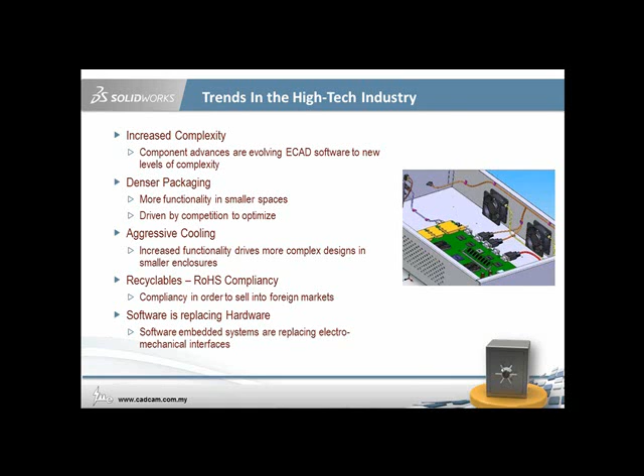First, the challenge for high-tech industry is to accelerate time to market in order to earn profit. High-tech industry develops various conceptual designs and looks for the optimal design. The testing in physical prototype during the development process can be reduced in order to get the product to market faster.

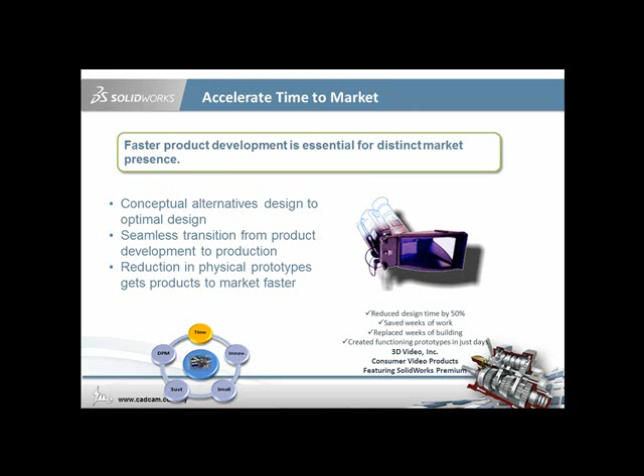Second, there is a need to continually innovate better product designs. Electrical and mechanical design requirements must be seamlessly connected in the design process.

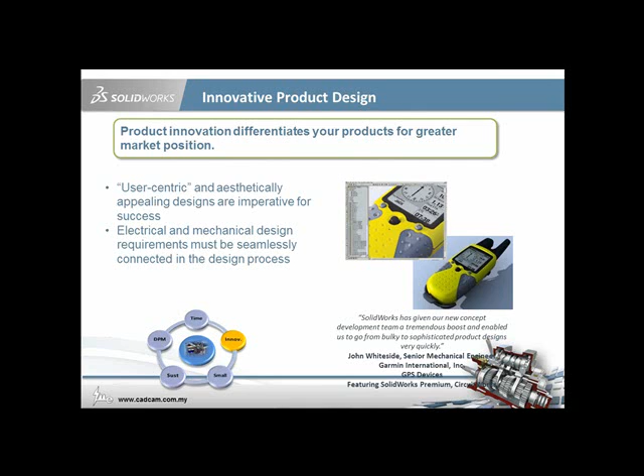Another challenge is to find a smaller, lighter, and better product. Packaging design in smaller space requires extreme precision for assembly modeling. Functional behavior of electronics must be carefully simulated to ensure product integrity. New materials help ensure that the product can be lightened without compromising strength and durability.

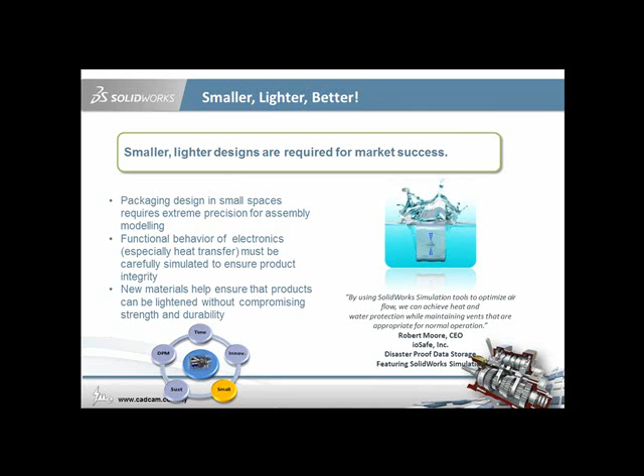Next, producers of high-tech items must take into account end-of-life considerations for their product. They are looking for solutions to validate design integrity while designing, and to find effective and efficient materials to achieve sustainable results.

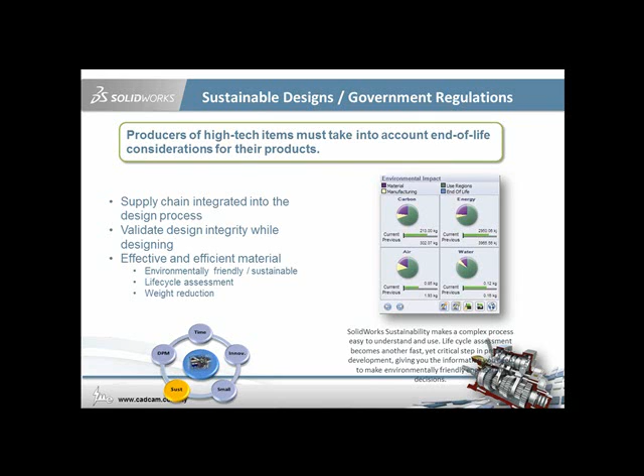Finally, the challenge faced by the high-tech industry is design process management. Successful companies must share design and analysis information across the enterprise. File collaboration is important to ensure design teams have immediate access to the latest product data.

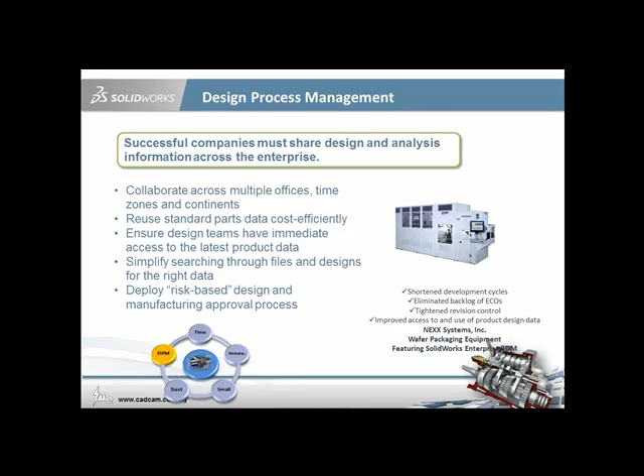This is the typical role in the high-tech industry. For the head of engineering, they would like to reduce the need for physical prototyping and yet achieve optimized results during design. Capabilities needed are the ability to simulate product behavior under actual testing in a digital environment, optimize the design, and evaluate different design concepts in certain scenarios, like temperature distributions for each concept.

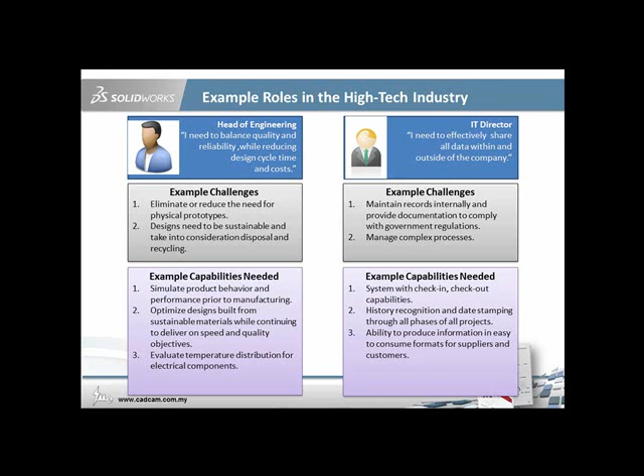For the IT director, they are facing challenges in maintaining records internally and providing documentation to comply with government regulations. Capabilities needed are design process management tools to help check files in or out in one system platform, history recognition and date stamping, and the ability to produce information to generate formats for suppliers and customers.

Now, let's look at the SolidWorks solutions in solving the high-tech capability. For the challenge of design innovative product, the SolidWorks 3D CAD design can be implemented, which integrates rapid prototyping and electronic capability.

For smaller, lighter product, assembly modeling in SolidWorks can be helped with simulations integration. For sustainable design, SolidWorks sustainability can be used to optimize material selection. For the design management process challenges, SolidWorks Enterprise PDM is implemented to manage huge data in a server and communicate files for each department securely.

Lastly, for the time to market challenge, SolidWorks 3D software helps design and produce engineering drawings as well as simulations in one design platform, to shorten the design cycle and accelerate the product to market faster in order to stay competitive.

This is the overall SolidWorks solutions to deal with the high-tech industry challenges. In this webinar, we will focus on the SolidWorks simulation.

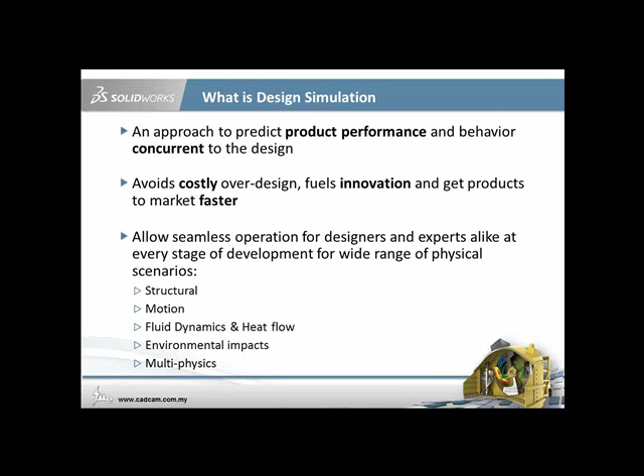These are the simulation toolboxes that integrate with the SolidWorks 3D design software. Simulation capabilities include structural analysis by simulation, motion simulation, flow simulations, and plastic injection analysis.

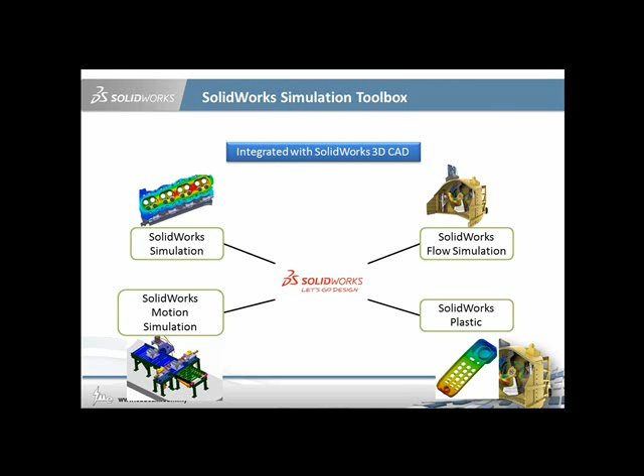Without further delay, now we will take a look at some of the simulation case studies specifically for the high-tech industry.

For the first case study, we will simulate multiple design concepts. In most engineering design situations, there will be several design alternatives or options. SolidWorks provides design configurations using which variations of designs can be created. SolidWorks simulation supports design configurations, and design validation can be done for any or all of the design configurations. Results of each design variation can be stored in the same model. This helps the decision-making process for the best design option and the effect of change in each design variation.

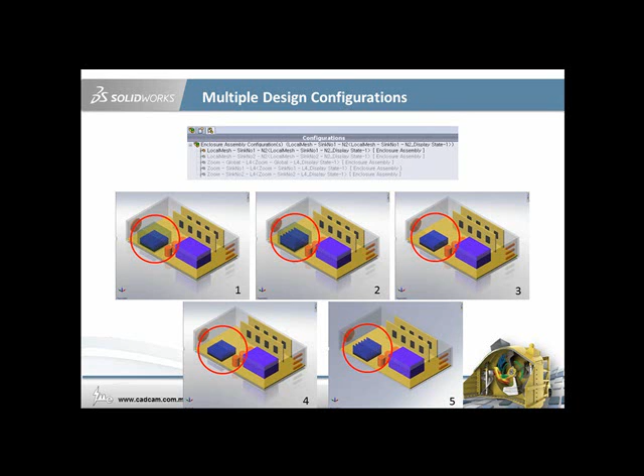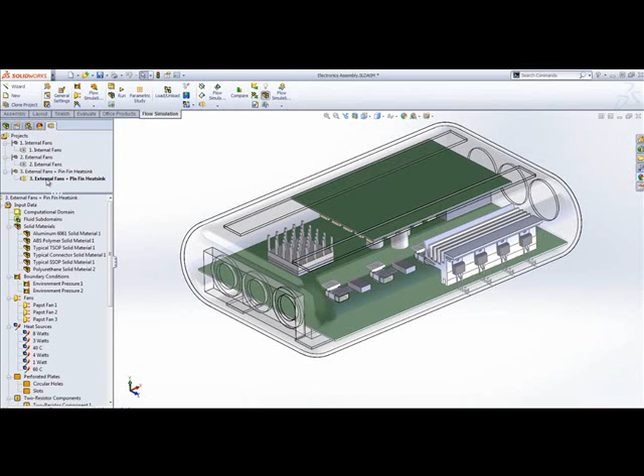Test the powerful capabilities of SolidWorks flow simulation for testing thermal performance of your design. In this electronic enclosure, we are going to compare designs to find the best option for minimizing heat buildup. We will look at having fans inside the box or on the case, as well as the effect of different heat sink designs. The model setup starts by defining the air inlet.

If there are slots or hole patterns on the vent, you can easily account for this without the need for geometry complexity. Within the computation, just specify a couple of parameters of the hole pattern and you are good to go.

The fans can be specified from a large built-in commercial library or specified manually. Heat sources for the electrical components are specified.

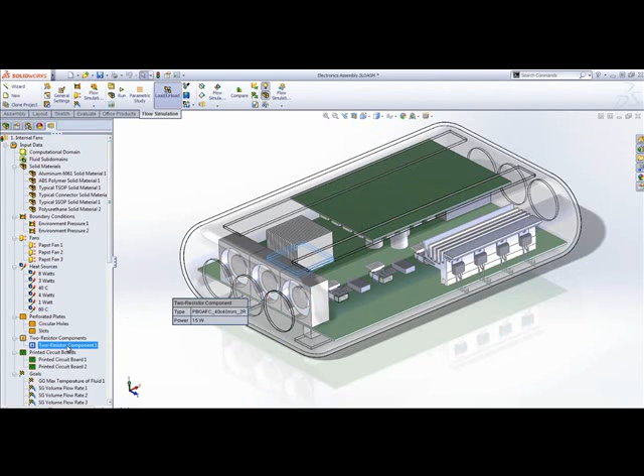SolidWorks flow simulation includes the ability to model semiconductor heat transfer, such as this CPU. Goals are then set up for key results or areas of importance, such as temperature of the CPU, integrated circuit, and memory chip. SolidWorks flow simulation excels in providing the ability to review results and easily gain insight into the performance of the design.

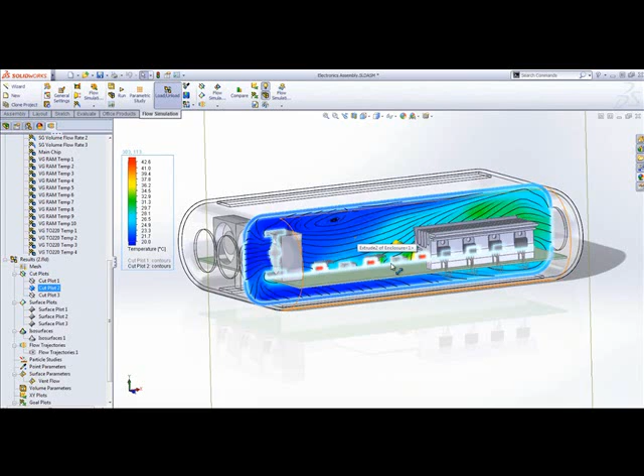The cut plot allows you to look at the cross-section of the model at any location and select from a wide range of characteristics such as velocity, pressure, and temperature.

A surface plot on the heat sink provides a clear view of the temperature distribution on this component, making it easy to identify uneven cooling and potential hotspots.

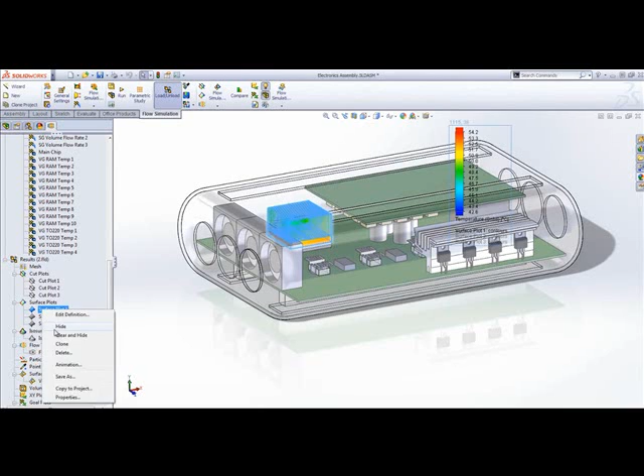Isosurfaces are used to show results of the same magnitude in the design, such as air temperature. You can readily adjust the value being shown on the fly as well. You can also display multiple value layers as well as adjust the color and transparency of the isosurface plot.

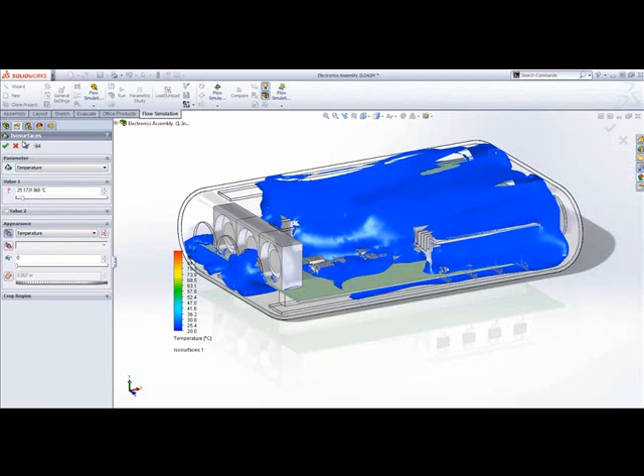With the flow trajectory, you gain incredible insight by visualizing the actual fluid flow, and can see far more than you would in any real experiment.

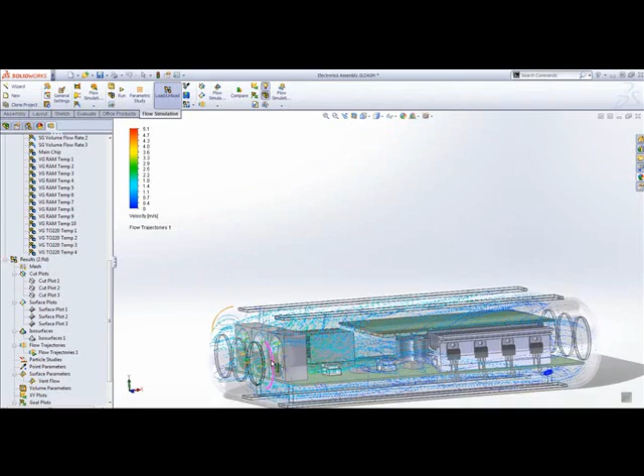With the ability to animate results and interact with the model, you gain great understanding of the product performance. Here, the swirl generated by the fans and the recirculation coming from under the PCB is easily detected.

The Compare tool allows us to easily compare visually and numerically the different design concepts and select the best options to move forward. You can select from the cut plot, surface or goal result and compare this over a subset of all the design variations.

SolidWorks Flow then loads each result set, captures the design information, and collapses it into images and tables for quick and easy review.

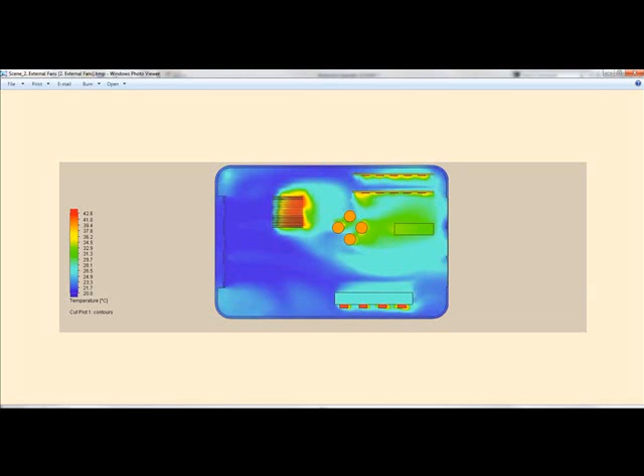Switching to the external fans configuration, we can see that the recirculation has been eliminated and temperatures have dropped. With the pin heatsink design, temperatures are not as low. Looking at the numerical results confirms this, with temperature in the CPU significantly lower with the external fans and existing heatsink.

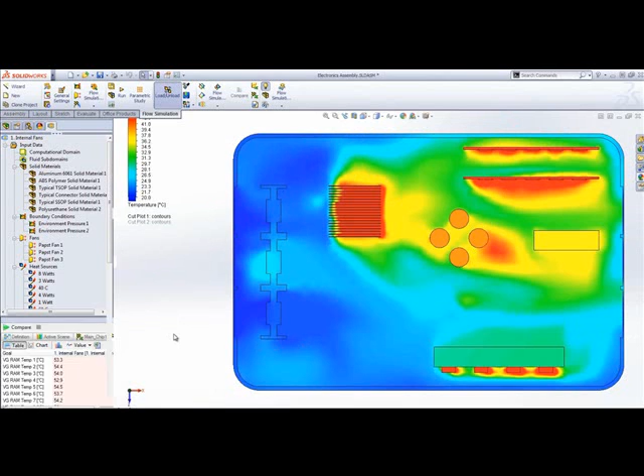With its intuitive and powerful flow and heat transfer capability, SolidWorks flow simulation enables product engineers to improve quality early in the design process.

Second example: let us look at what requirements you need to consider when you design components which generate heat, and this heat has to be dissipated properly. To do this, there are so many formulas, and it is difficult to do by hand calculation.

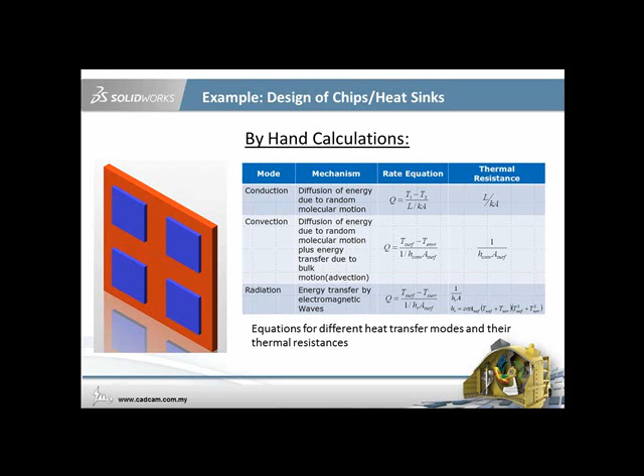We will show you the demonstration of this chip simulation and how it is integrated with the SolidWorks 3D CAD software.

This is the computer chip. The engineering drawing has been created, and we can see that the current design dimension is 3.17 mm from the chip end to the substrate.

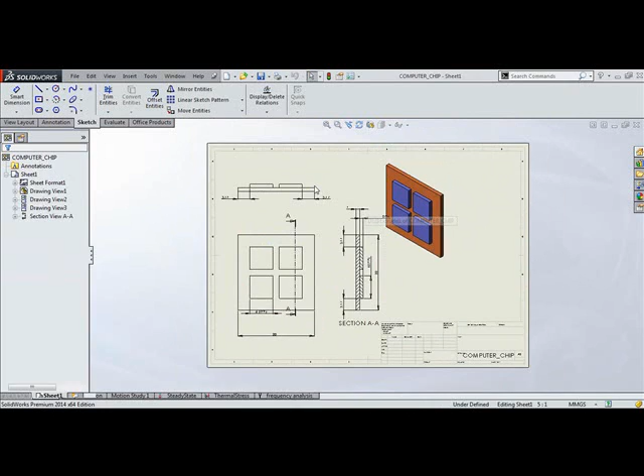The steady state study was created. First, the material for each chip can be defined under the material library.

If you want to customize the material, you can save it under the Customize folder with its unique material property. From here, you can see that the thermal conductivity depends on the temperature.

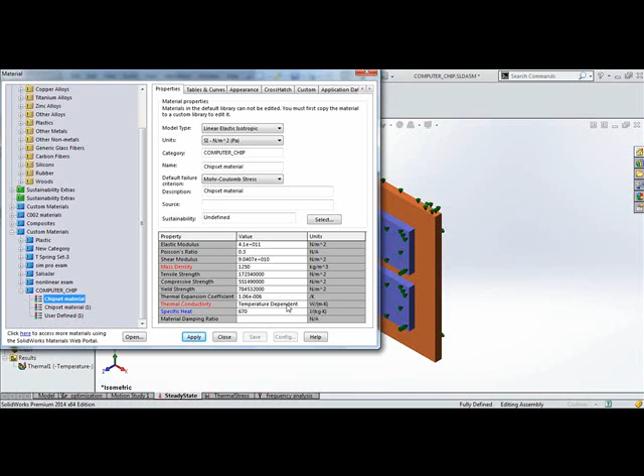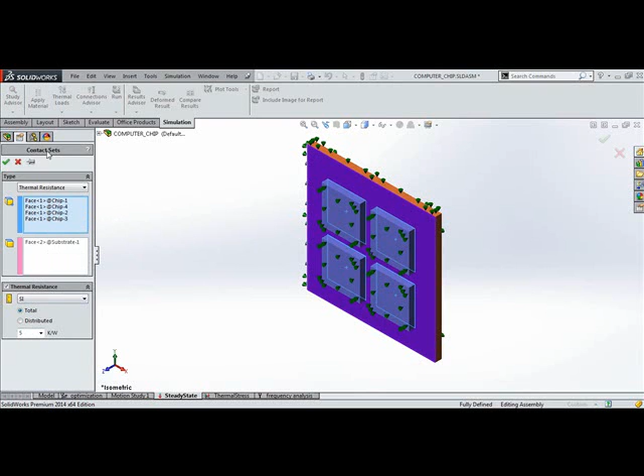The simulation setup includes defining the thermal resistance between the chip and the substrate, heat power for each chip with 0.2 watt, and convection parameter for each component with environment.

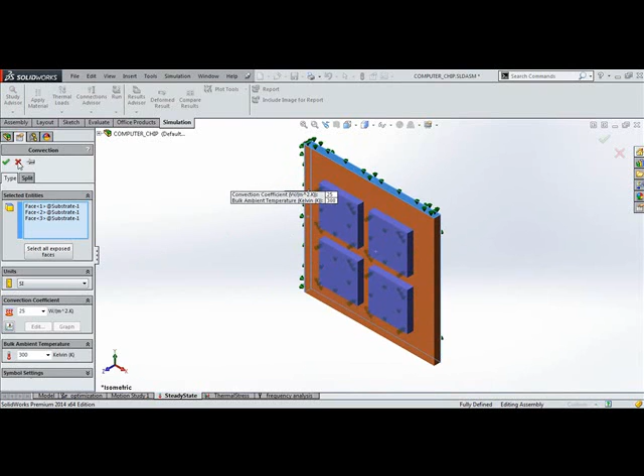After the setup is done, we can review the temperature distributions in this chip assembly due to the heat source, thermal resistance, and convections that we defined previously.

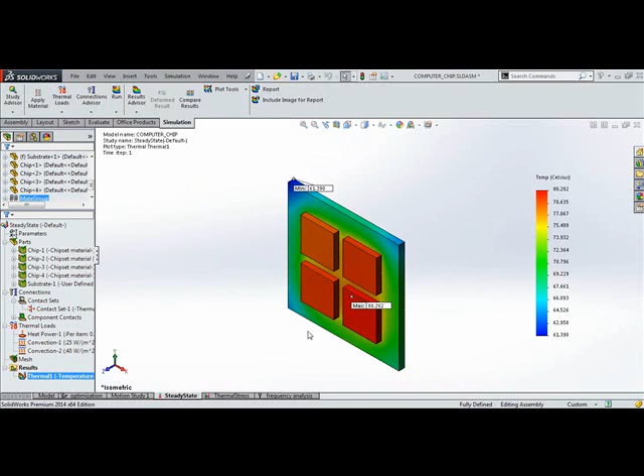If you want to calculate the stress due to the result you obtain from this steady state analysis, you can easily import the temperature result to the thermal stress analysis. From here, you can review and study the stress displacement due to the temperature calculated in the previous steady state analysis.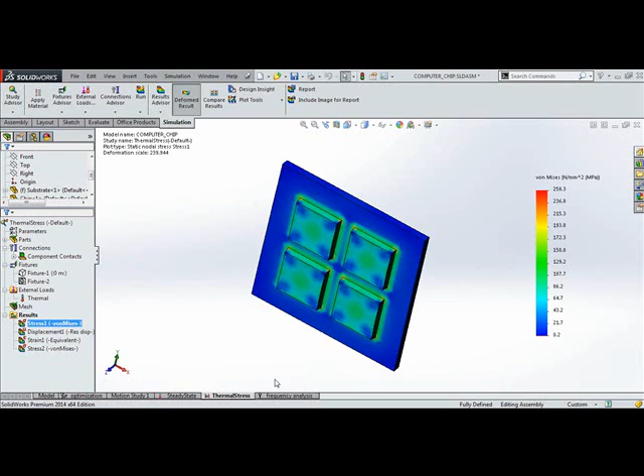You also can run a specific study in this assembly, like the frequency analysis, to find out the natural frequency that will lead to the resonance phenomenon. We have calculated 5 mode shapes, and you can animate to see the behavior.

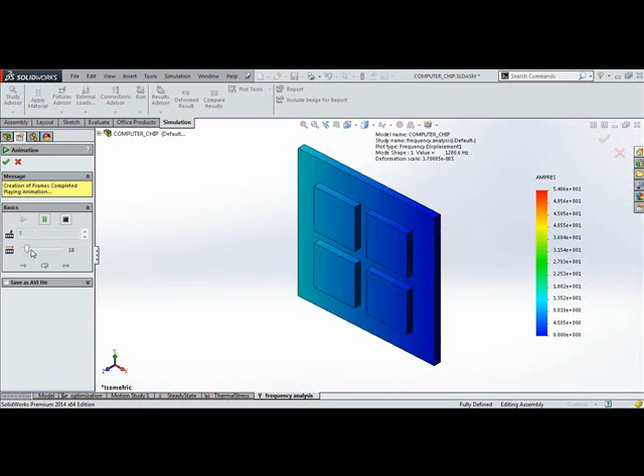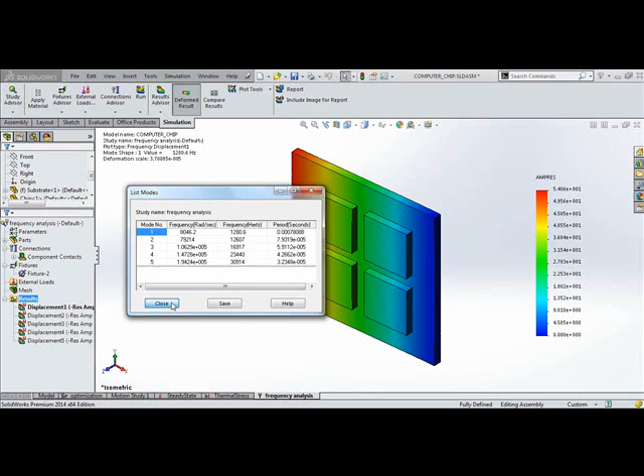Under the list of resonance frequency, you can find each mode with its natural frequencies value. If you would like to minimize the natural frequency, you can change the chip location, but there are many variables that can be controlled.

With the optimization, you can easily input the parameters, requirements, as well as the design goal.

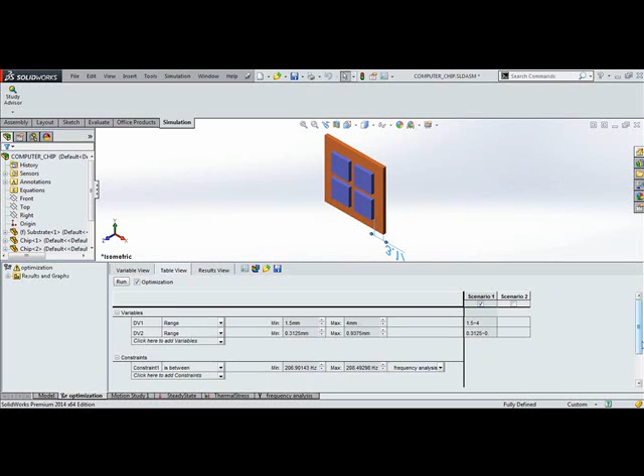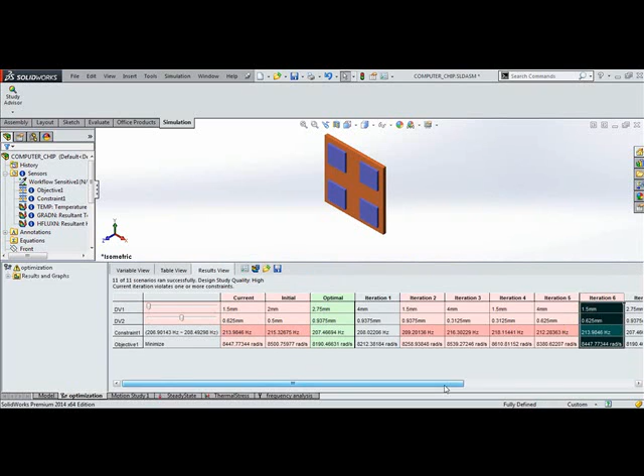Lastly, you can review the optimized result. From this optimization, if you calculate many iterations, you can review each iteration as well. The model will update automatically based on the design variable, and the drawing will update to show the latest design.

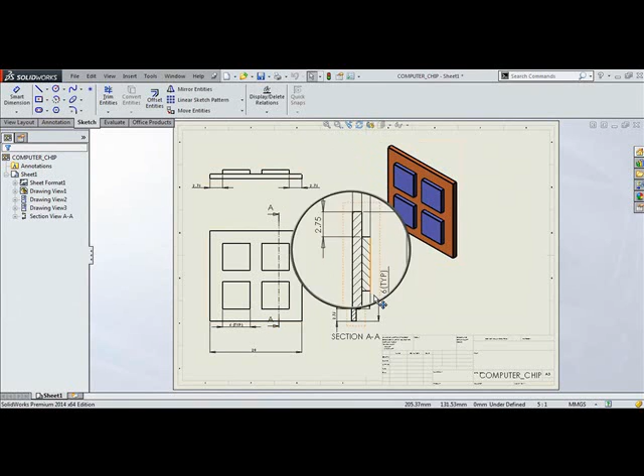Another case study shown here is the motion simulation of a DVD player. A DVD player manufacturer develops a mechanism to open the tray to load the DVD. They do not know the correct size of the electric motor that they need for their tray mechanism.

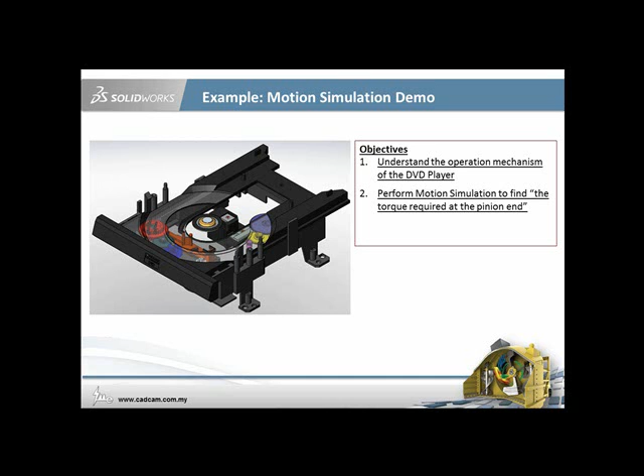By performing a motion analysis, they are able to size a motor that consumes the least power and opens the tray in a predefined time.

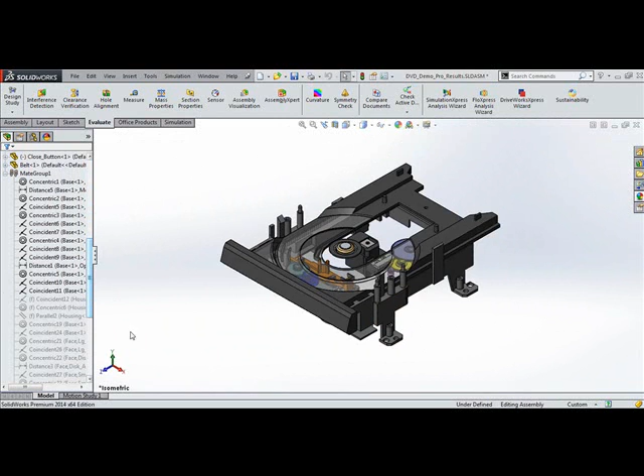This is the DVD player assembly. All the components are connected to each other by the mate. In order to calculate the motor torque required to open the DVD tray, motion simulations can be performed.

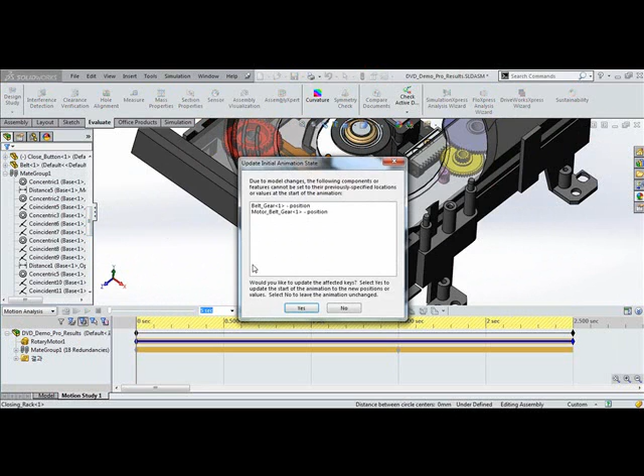From here, you can add a rotary motor on the gear pinion. This is the kinematic system, where there is one driving motion. Other components will be moved based on the mechanical connections as we have defined under the mate. You can play the animations to see clearly how the mechanism works.

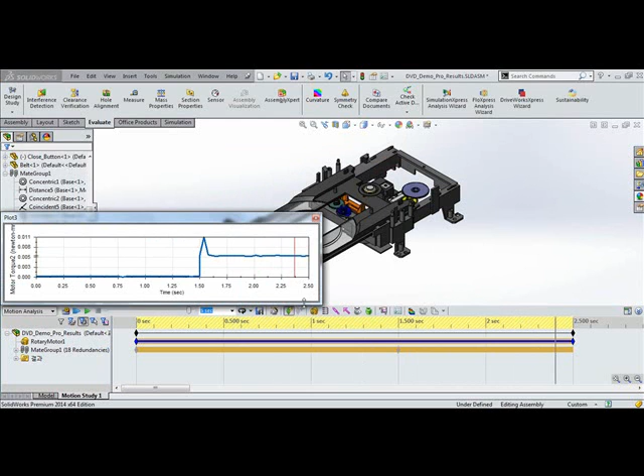Lastly, we can plot out the motor torque required for this mechanism, and you can size the motor based on the result you obtain under the motion simulation. From here we can see that the motor torque required is 0.011 Newton mm for this DVD player mechanism.

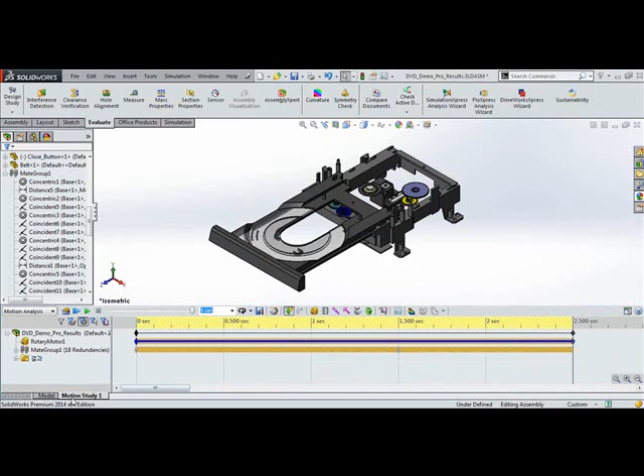There are a lot of worldwide customer success stories from implementing the SolidWorks solution. For example, Thermo Electron Corporation, an infrared spectrometers manufacturer which is used by a wide variety of chemical analysis processes

and procedures. They are ensuring the casting had no resonance in the frequency range that would be transmitted adversely to the optical detector. By using SolidWorks simulations, the learning curve is reduced and the results were within 5% of the empirical value.

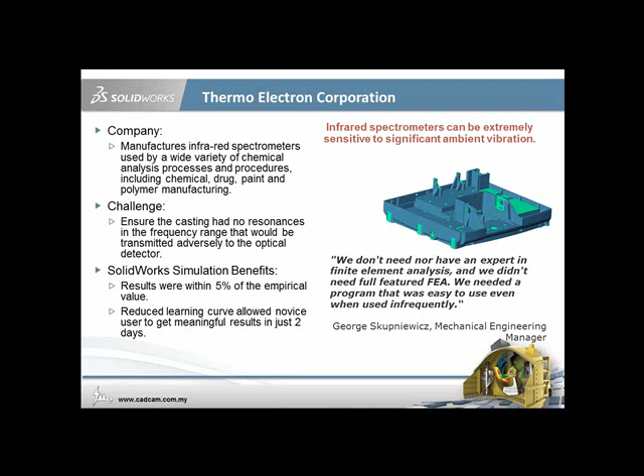Another example shown here is Sorrento Networks, a leading supplier of optical networking equipment for carriers and enterprises worldwide. The challenge facing them is both designers and engineers must understand thermal issues and constraints in the design phase of a project. By implementing SolidWorks simulation, the results are easy to interpret and able to review certain design criteria.

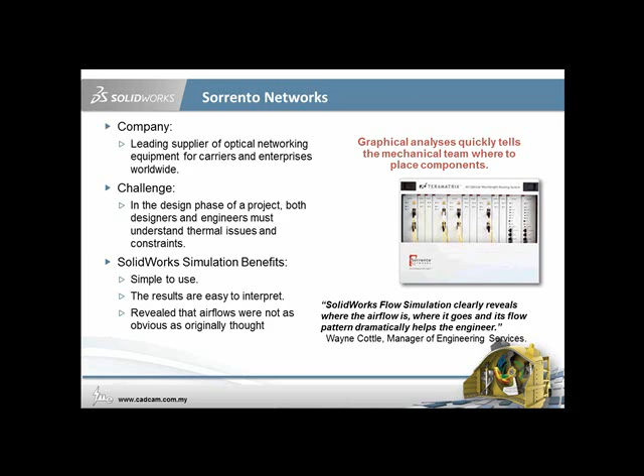Next example here is Delphi Packard Electric Systems, one of the world's leading manufacturers of automotive electronic components. They need a tool to quickly design and test the connection system inside an automotive electronic module. After using SolidWorks simulations, they are able to move from concept to the first structural analysis in just 2 days. Time saving directly related to money saved.

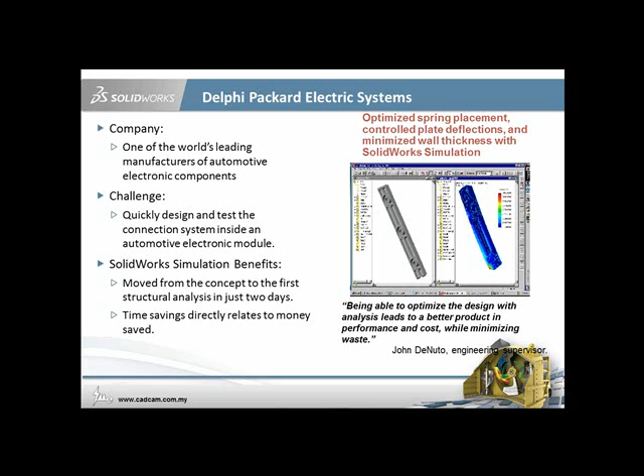As a summary, the high-tech industry has its unique business challenges like time to market, designing innovative products, smaller lighter products, sustainable design, and design process management. SolidWorks has proven the solution for these critical business challenges, and thousands of SolidWorks customers are successfully addressing these business issues today.